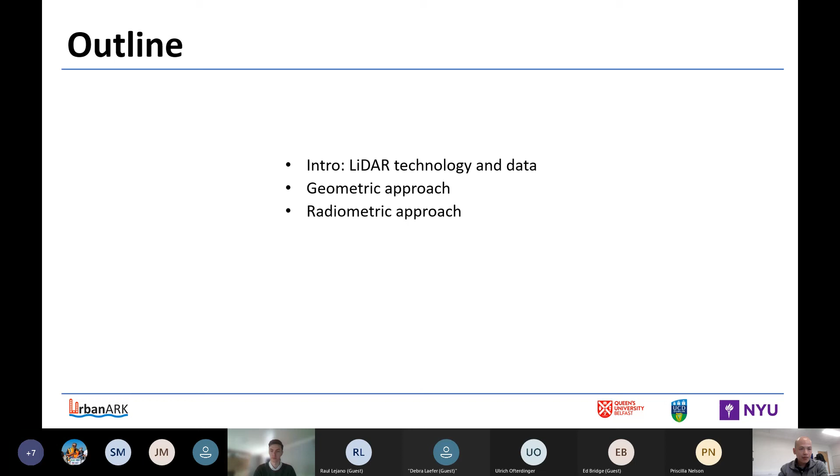So that is the outline of the presentation. I will first provide an overview of LiDAR technology and LiDAR data, and then I will go on to introduce the two approaches. We call them the geometric approach and the radiometric approach. So LiDAR is an acronym for light detection and ranging. Essentially, it's a technology that uses light, usually in the form of a laser, to measure range or distance.

The diagram you see on the screen shows the operating principle of the most common type of LiDAR, which is called time-of-flight LiDAR. Here we have a LiDAR sensor on the left-hand side, and on the right-hand side, we have a target surface. What we aim to achieve here is to measure the range value R, which is the distance between the sensor and the target object.

To do that, the sensor emits a laser pulse, which is a strong and short impulse of optical energy towards the target surface. The sensor then captures the time for the laser pulse to travel to the target surface and back to the sensor. That amount of time is denoted as t, parameter t here in the equation.

And when we know the travel time and the traveling velocity, yes, we know how fast light travels, then we can calculate the traveling distance. Because it is a round trip, we need to divide the traveling distance by 2 to obtain the range value. So that's basically the principle behind most LiDAR systems. There are 2 additional points I want to highlight here.

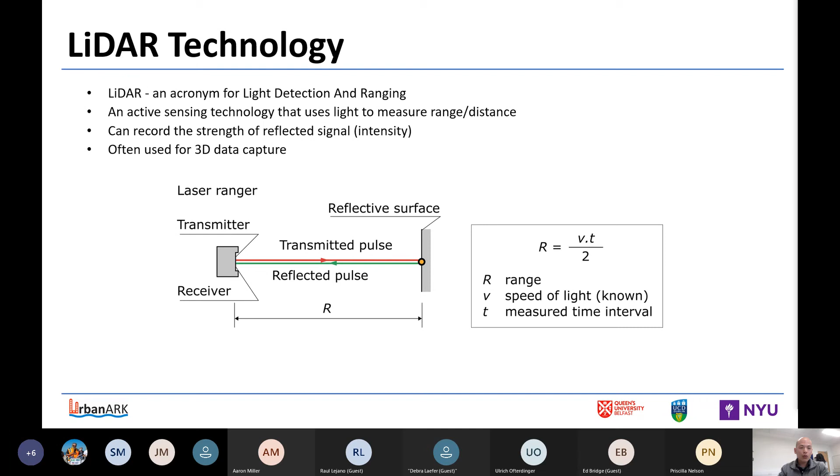Second, in addition to measuring distance, most LiDAR sensors record the strength of the reflected laser signal. So in the presentation, I use the term LiDAR intensity to refer to that signal strength. And that intensity value represents the radiometric property of the target objects. You can think of it like how reflective the target object is to LiDAR.

So if you have heard about LiDAR before, there's a good chance that you know LiDAR as a 3D mapping technology. But what I introduce here is a ranging technology. So what's happening here is that this LiDAR sensor is very often used in conjunction with additional sensors for 3D mapping. The LiDAR itself can do ranging only, but we can incorporate the LiDAR sensor with additional mechanisms to do 3D mapping.

So, for example, in the animation you are seeing here, a LiDAR sensor is mounted on a helicopter. A scanning mechanism sweeps the laser across the flight track, and together with the movement of the helicopter, let me play the animation again. So together with the movement of the helicopter, we can cover not only a single point, but a large spatial extent along the flight track.

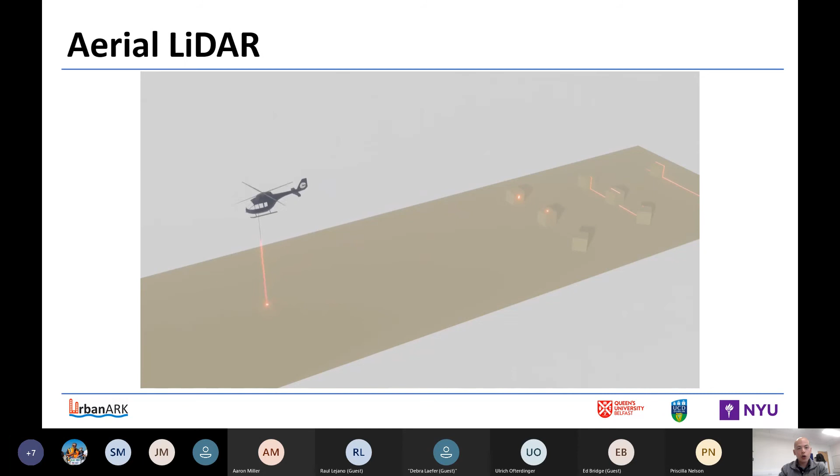And by combining the raw ranging data from the LiDAR with the angle of the laser beam, as well as the position and orientation of the helicopter, we can derive a 3D representation of the scene we fly over. So that is an overview. That is an example of such a 3D representation captured by airborne LiDAR.

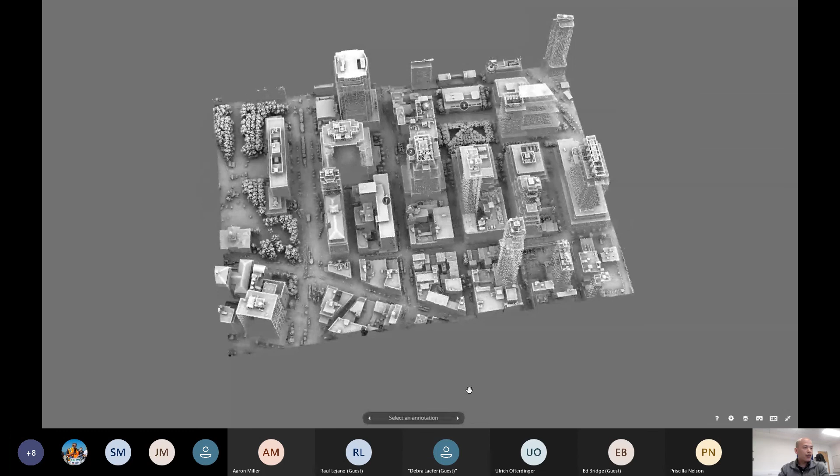Let me show you in an interactive form. So that is the 3D representation captured by LiDAR. The area you are seeing here is 370 Jay Street. That is the Center for Urban Science and Progress. That is One MetroTech and the library of NYU Tandon. Let me switch back to the presentation.

So the data captured by LiDAR are usually referred to as 3D point clouds. A point cloud is a spatially coherent but unorganized set of 3D points. If you open a LiDAR data file and look at the numbers inside, you will see that a point cloud is composed of a set of point records. Each record or each row in the table represents a spatial point, and a record contains the 3D coordinates of the point as well as additional attributes such as intensity values.

or currently being collected. The project is expected to complete by 2023, and one of the main uses of LiDAR is to create digital elevation models, including digital terrain models and digital surface models. The USGS has identified more than 600 business use cases potentially benefiting from LiDAR and data products derived from LiDAR. The top one on the list is flood risk management. One of the biggest contributors to the project is FEMA, the Federal Emergency Management Agency.

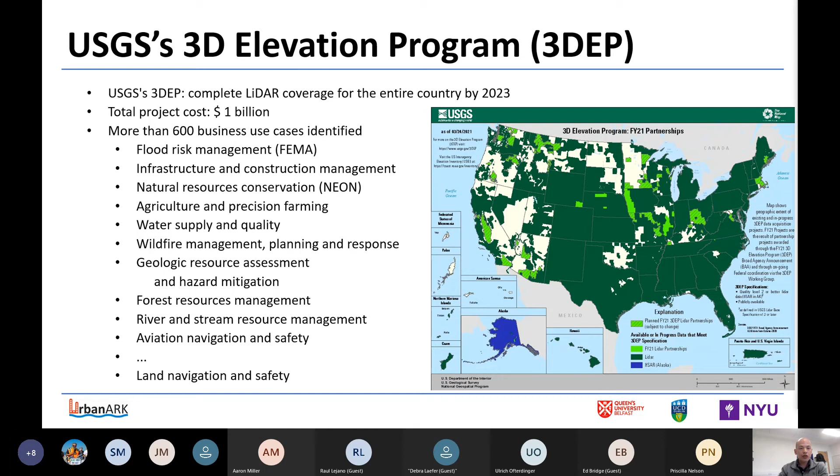Such an amount of data could very easily defeat many traditional computational solutions, and that calls for more powerful, more efficient computing approaches. And that is exactly what motivates our research here at UCD. We are working hard on developing innovative LiDAR data management and analysis algorithms that can take advantage of massively parallel computing infrastructure to tackle the large and increasing volumes of LiDAR data.

And the algorithms for subsurface structure detection are part of the research outcome that emerged along this research direction. So before discussing the geometric approach, let me go straight in and share with you an example of the result that we obtained from the algorithm.

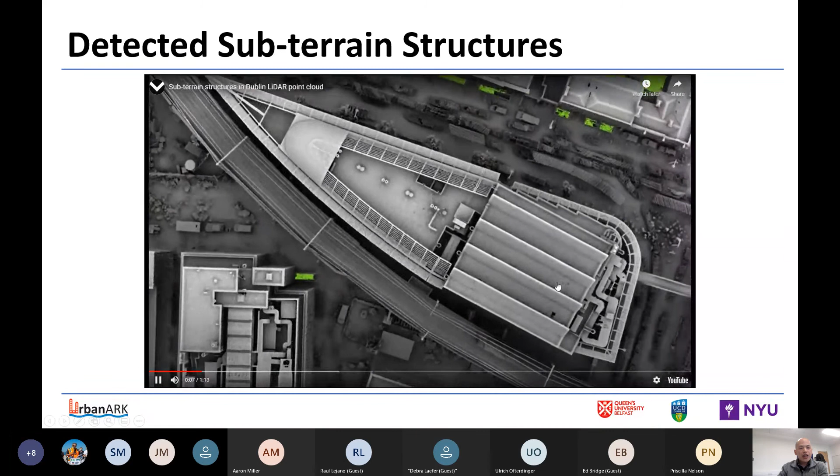The video is loading. Yeah, so you are seeing a three-dimensional point cloud colored in gray, and the green points overlaying the point cloud are the subterranean points that were automatically extracted. Here you can see an outdoor staircase that leads from the ground level to a basement at the back of a tall building in Dublin city centre.

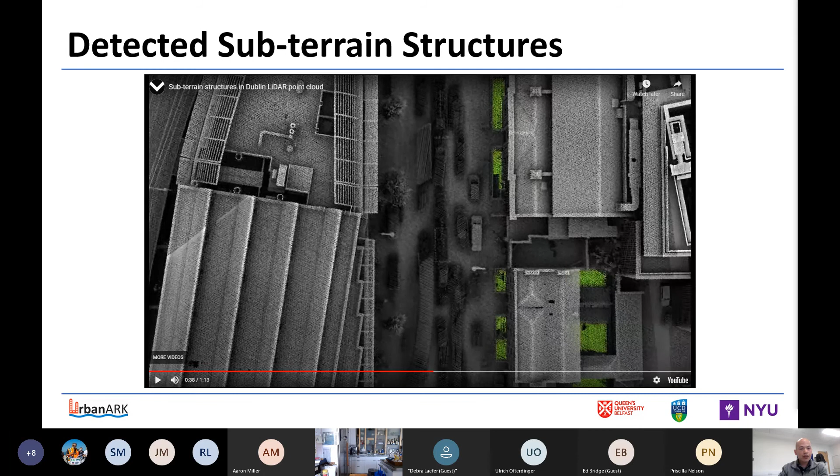I'm continuing the video. So if you know Dublin, you may know the Science Gallery, which is part of Trinity College Dublin campus. And across the road from the building, we have some Georgian terrace houses. As typical in Georgian architecture, the houses have front basements visible from the street, and the back gardens are lower than the surrounding terrain. The cross-section showing up in a couple of seconds may show you the structures clearer.

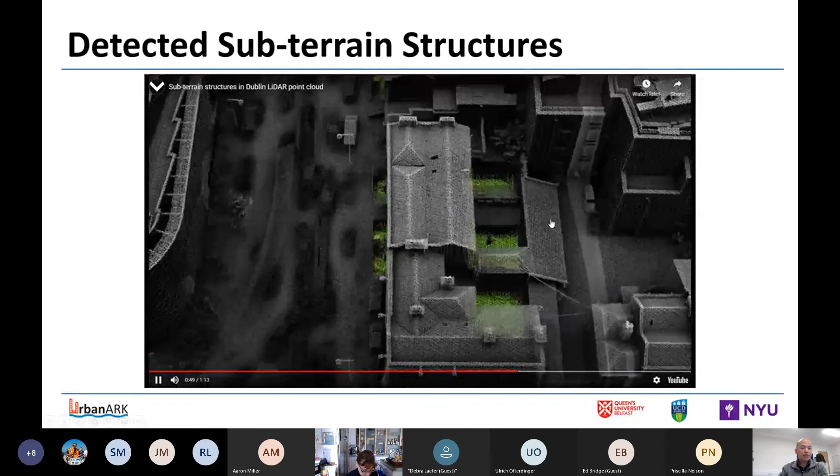So this is the cross-section we are waiting for. Again, the green points are those detected as reflections received from subterranean structures. As you can see, the front basement and back gardens were successfully detected and extracted by the algorithm I'm presenting today.

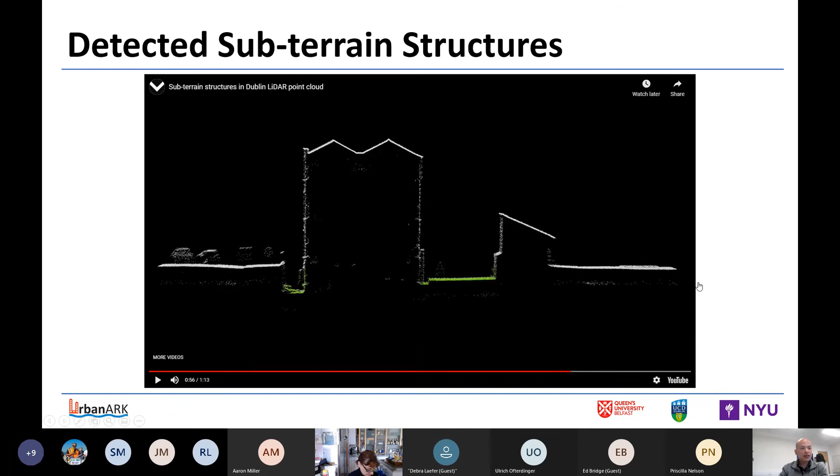So the reason we in UrbanARK are interested in developing such an algorithm is because subterranean structures have an important role in flood risk assessment. First, the structures lying below the ground level, particularly those used for residential purposes, are more vulnerable to flooding, and we need the knowledge of such structures to better analyze the risk and the vulnerability.

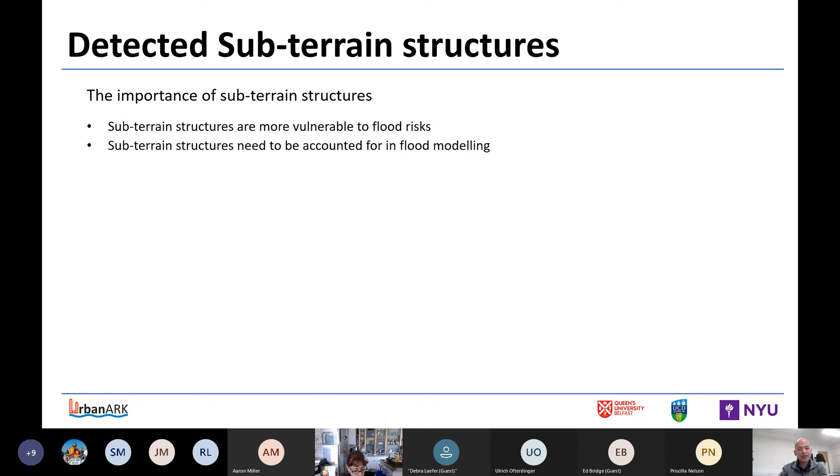Second, we see that subterranean structures are important for accurately predicting flooding. Those structures have impacts on the dynamics of the flood flow as well as the inundation level in a flood event. But most existing flood models do not account for the impacts of subterranean structures.

Our geometric algorithm has four main characteristics. First, it is based on a very simple geometric principle. Second, it is parallel. More precisely, it is massively parallel. And massively parallel is not a marketing term. It's actually a technical one. The term refers to the use of a very large number of computer processors, potentially from multiple computers, to massively reduce the computational time. So the reduction can be in the range of several hundreds of times.

And that characteristic is related to the third one, which is scalable. Because of the ability to compute in parallel, the algorithm is suitable for dealing with a large amount of data and to cope with future increases in data volume. And that's the key characteristic that distinguishes our work from others.

The last characteristic is robust. We have tested the algorithm under various scenarios using different kinds of data in all of our 3 study sites in Dublin, Brooklyn, and Belfast. And we see that the algorithm works consistently.

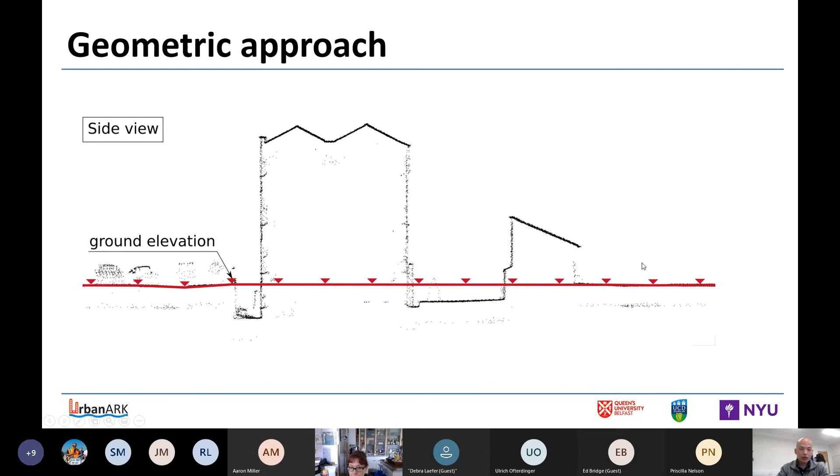So here is the simple principle behind the algorithm. The data to be analyzed is a 3D point cloud that contains geometric samples from the terrain as well as above ground and below ground objects. We assume that we have a digital terrain model that gives us ground elevation over the area of interest. Those are shown in red color. And you can think of a DTM as a membrane that cuts through the point cloud and separates above terrain and below terrain data points.

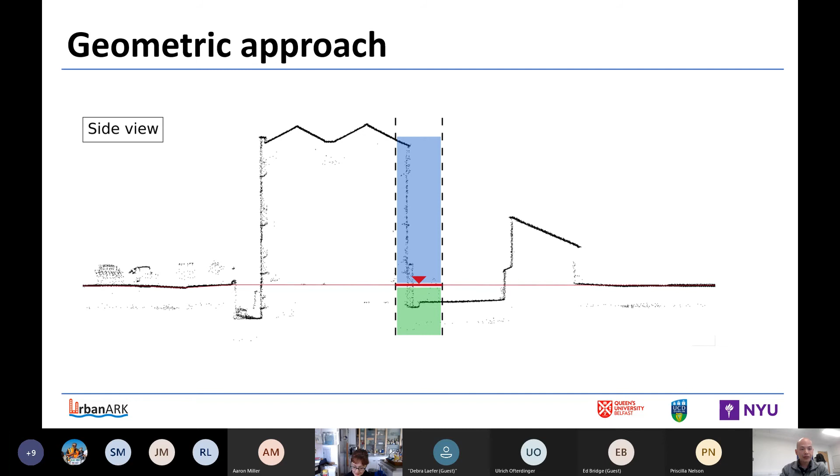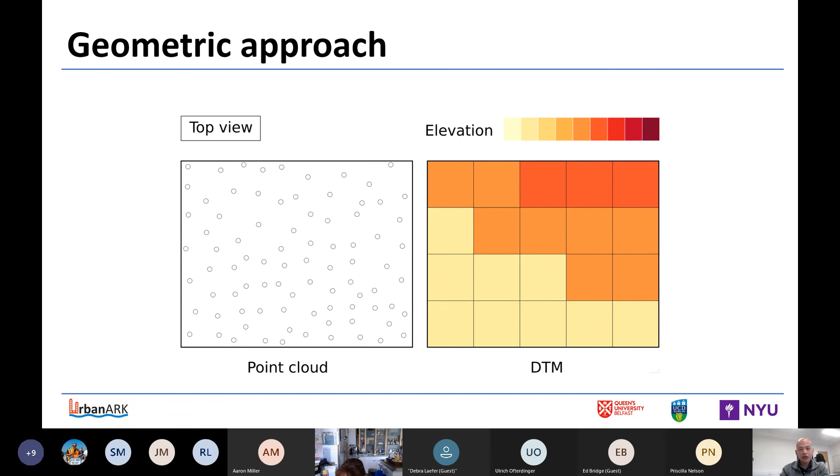What we need to do in order to use the DTM to detect or extract subterranean points from the point cloud is to line up each point in the point cloud with its corresponding ground elevation indicated by the DTM. The point cloud is irregularly distributed, as you see in the figure on the left-hand side. And unlike the point cloud, the DTM is often represented as a raster, meaning that the elevation values are structured in a regular spatial grid consisting of cells or pixels arranged in columns and rows, as you see in the figure on the right-hand side.

So you may remember from the earlier introduction of LiDAR data that the geometric component of a LiDAR point is represented as a triplet of X and Y and Z coordinates, usually in a geographic coordinate system. And each raster cell in the DTM is represented by its raster index and an elevation value Z. The raster index is a second-order tuple that contains the row index and the column index of the cell, which are identified in the discrete coordinate system of the raster.

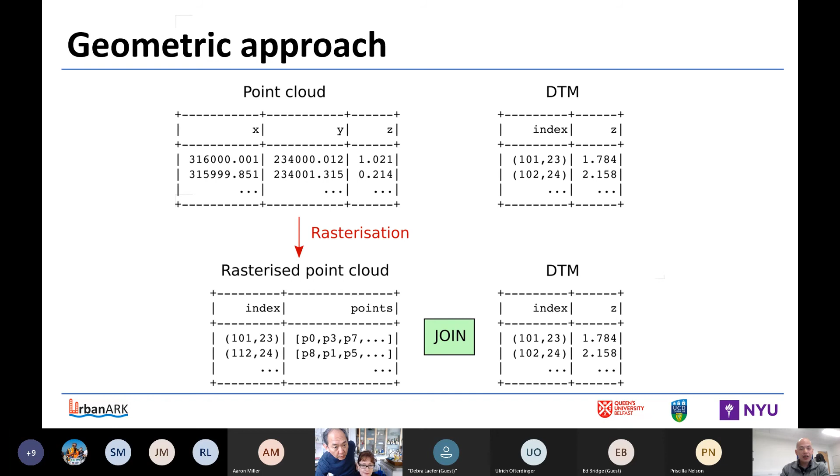So our job is to transform the two input data sets into an agreed format and an agreed coordinate system so that they can be linked together. The format that we selected is the raster format of the DTM. In other words, what we do is to rasterize the point cloud. And after the rasterization, we have a common index, which is the second-order tuple here, for both the point cloud and the DTM. And at this stage, the join is very straightforward, except that both of the input datasets are very large. Each can contain several billions of records, and joining such large datasets is computationally complex and time-consuming.

The algorithm that we developed has an efficient way to team up multiple processors from many machines to perform the complex and demanding operation very rapidly. Just to give you a quick sense, we tested a relatively large dataset of 1.4 billion points here in Dublin, and performing the detection took almost 2 hours with one single core. But by connecting 128 cores together, we were able to reduce the processing time to just over 2 minutes.

And that computational efficiency behind the parallel join is actually the main accomplishment from the research point of view. But as it is not the focus of our discussion today, I will not go further to provide details of how we actually did it. Instead, I'm sharing a few more examples of the results that we obtained, this time for an area in Brooklyn, so that I hope you can get a clearer idea of what the algorithm is capable of.

And this is the input point cloud on the left and the digital terrain model on the right that we used. The point cloud shown on the left is part of an aerial LiDAR survey Professor Deborah Laefer undertook in 2019 over the Sunset Park area in Brooklyn. The point density of this dataset is over 500 points per square meter, which is 50 times higher than the typical aerial LiDAR point density. That high density is very critical to the success of the algorithm.

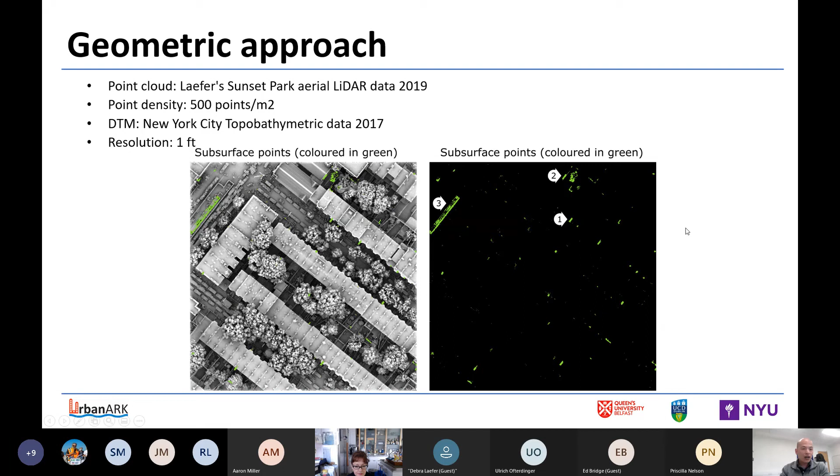The last example I want to share is not from a house, but from some kind of urban infrastructure, which looks like a ventilation shaft of the subway system. The structure sits on a traffic island. The structure has a part that is lower than the street level, and that has covering grates, which are not entirely solid. What we see here is that the LiDAR beams were able to penetrate through that cover and capture the lower points underneath, and our algorithm was able to detect those as well.

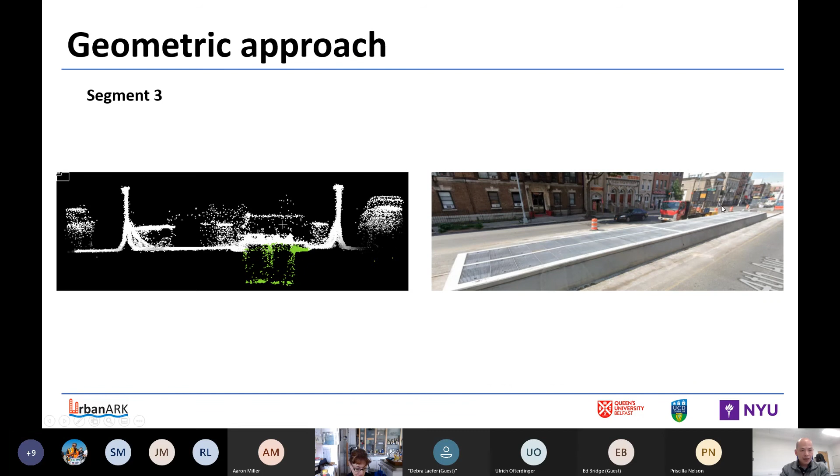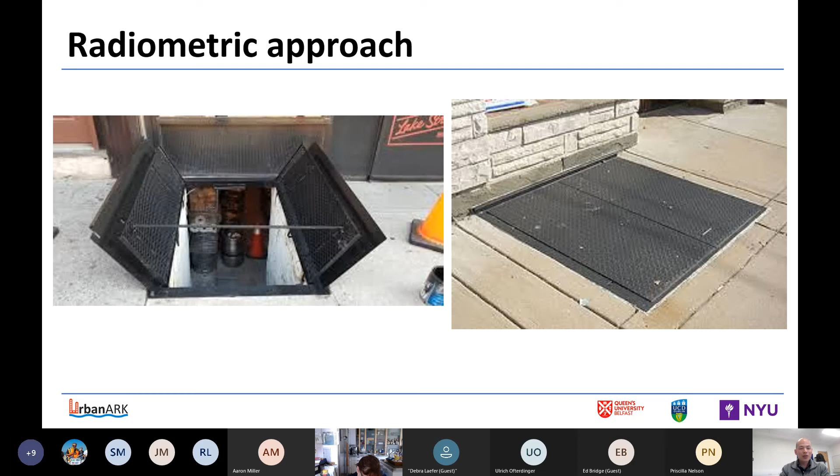Now I'm moving on to the second approach called the radiometric approach. There are actually some initial thoughts that we had when we heard about the sidewalk vault problem in New York. The geometric approach I just presented would not be able to detect those that are covered unless the covers are open, like the image on the left-hand side. But in addition to the geometric information, LiDAR also captures the radiometric properties of the scanned object. And that information is represented in the last column, column I, or intensity, in our table here.

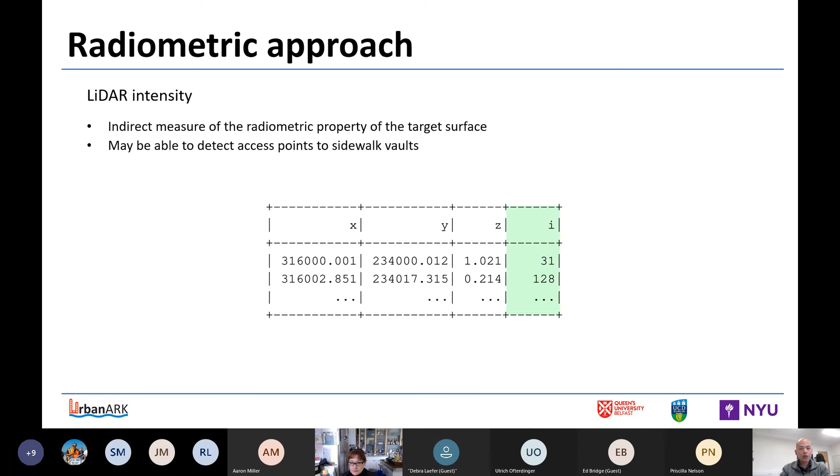To recap what we mentioned before, the intensity attribute indicates the strength of the laser signal when it is received at the sensor. That attribute partially represents the reflectivity of the target surface. In other words, the radiometric properties of the surface. And our hypothesis is that the radiometric data can be used to detect the covers of some sidewalk vaults if the covers are made of materials that are distinguishable from surrounding pavement. And that is an initial result that we have.

Also, using the radiometric approach is not as simple as selecting points that have intensity values that fall within a certain range. A better way to use that is to combine the radiometric attribute with geometric information. For example, we can perform a spatial clustering operation to group nearby points that have similar intensity values. Then we could potentially extract the shape, the size, and the location of each cluster. And those derived information then become the input to the object detection process.

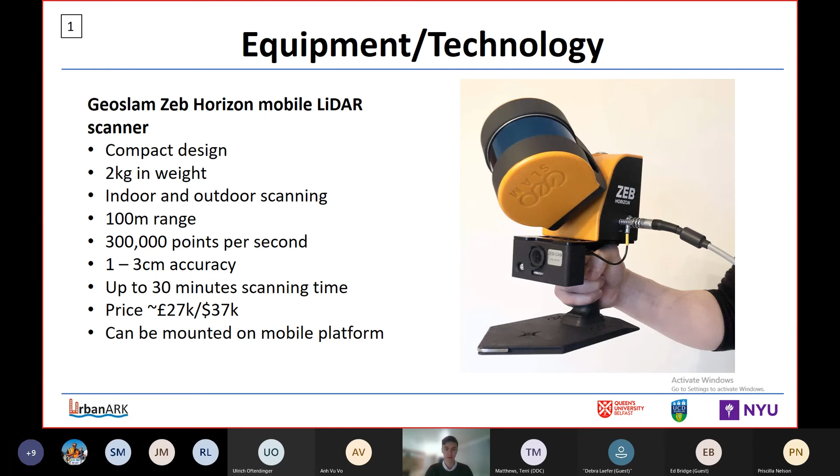As I said before, the GeoSlam captures 300,000 points per second, and that leads to the point density of this one on the left being 30,000 points per square meter, which is just far above what's available with aerial LiDAR, and what's available in Belfast is 4 points per square meter.

So you can really see the difference there. And so how does the equipment work? Well, the equipment works using SLAM technology, as is in its name, GeoSlam. SLAM stands for simultaneous localization and mapping, and it allows the scanner to create a 3D model of the environment around it and locate itself within that environment. This is the same as how robots work when they're moving their way through a room. They know where they are, they're able to know their distance between them and all the objects around them.

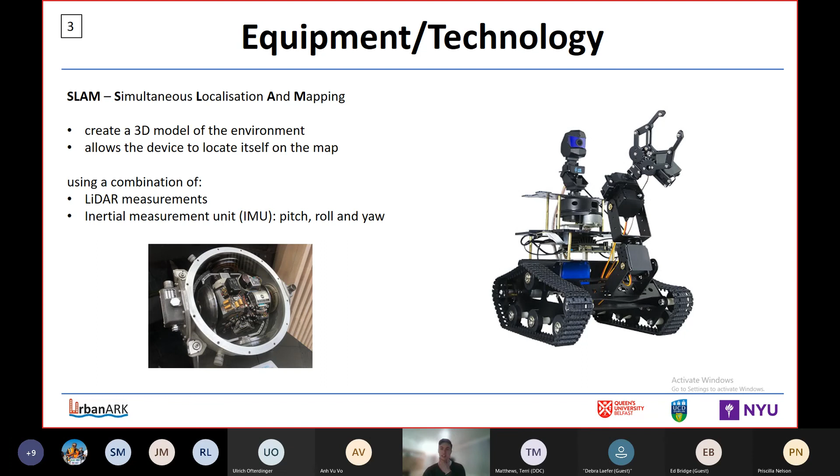So how does SLAM work? It uses a combination of LiDAR measurements. As we mentioned, LiDAR is pulses of light, and the machine takes in how long that light takes to return to the machine, and by that gets distances to objects. So we've taken into account distances to objects. It knows where it is in relation to those objects around it.

It also uses an inertial measurement unit. Inertial measurement units are typically seen in aircraft, or in this case, this massive one here is from a spacecraft, a NASA spacecraft. So the one in the machine isn't quite as big as this, but pretty much it is used so that the device knows its orientation in space. So it knows what direction it's pointed, it knows if it's been tilted or if it's pointed at the ground or upwards. And using a combination of its distance to other objects and how it's orientated in space, it's able to work out where it is in the map.

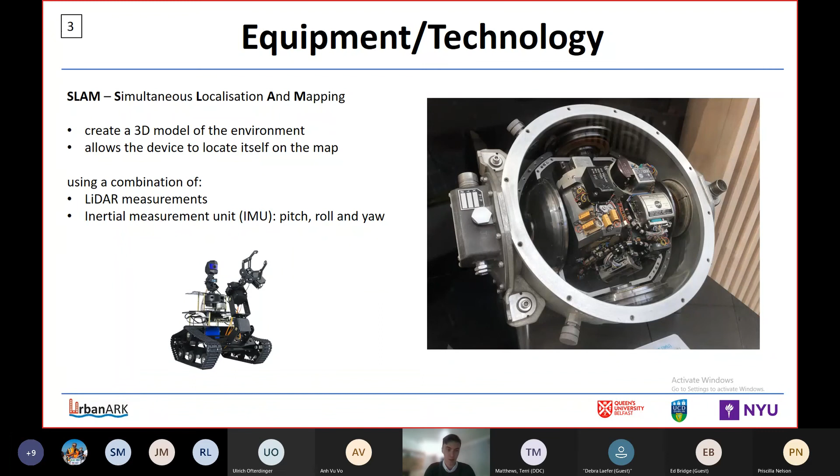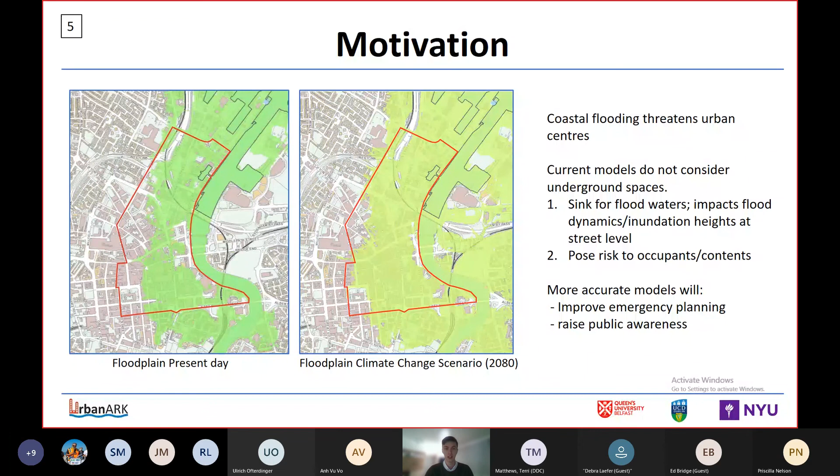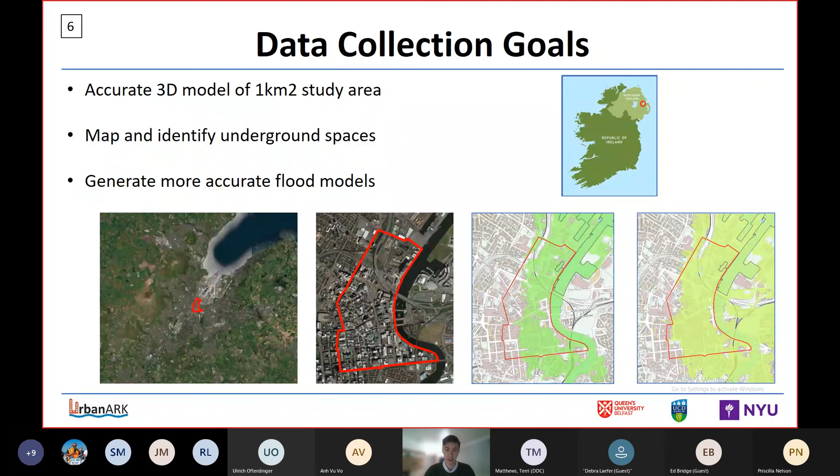So as I said, the data collection goals. Here's a better look at our study area in Belfast. You can see it's right on the east coast of Northern Ireland. If you didn't know where Belfast was, you can see our study area is in the urban centre, and it's right at the coastline. What we want to do is create an accurate 3D model of our 1 kilometre squared study area. As I said, map and identify the underground spaces and generate more accurate flood models.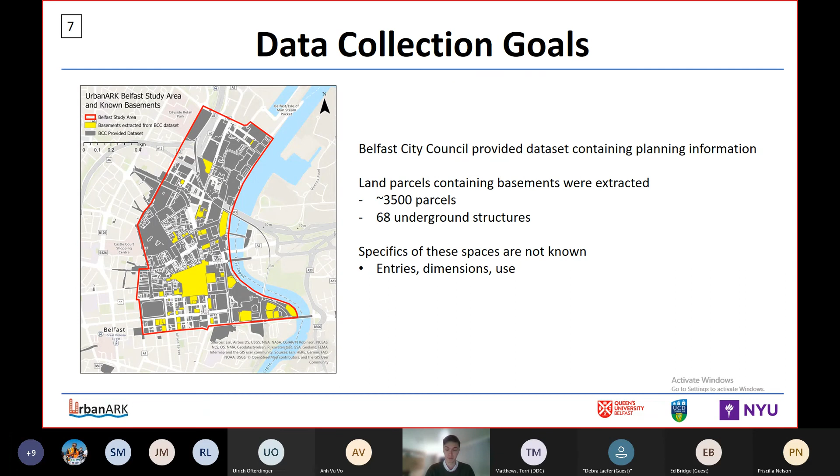The problem with that is these are land parcels. Each one is not relevant to a building, and they're not the same shape as the building, so you're not getting the dimensions of the basements or the depths. We're also not getting the entries to the basement. We don't know if there's vehicle entries or if it's just windows or doorways. We don't have any of that information, so we don't know how these would interact with floodwaters. They do have a use with them, but a lot of them, from my experience, have been outdated. And we know that uses of spaces change over time. So we want to update all of this information.

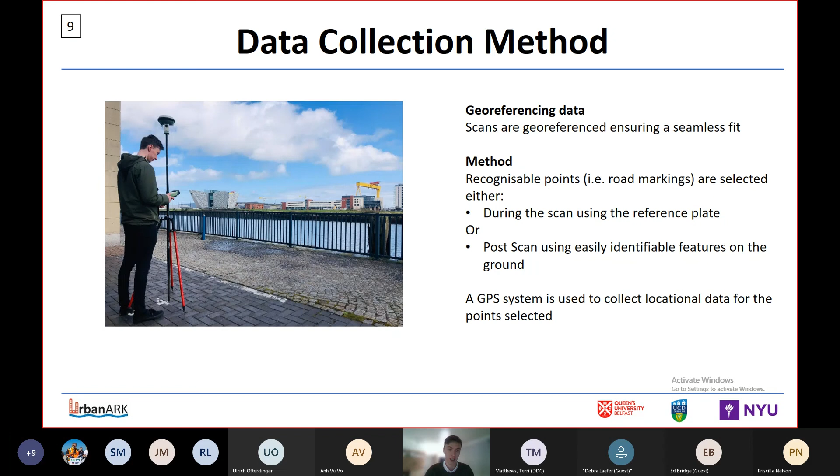There's the Titanic Museum and the Harland and Wolff cranes, and I'm collecting GPS data. So the first method here is the reference plate method. So again, on the left, you see the GeoSLAM. At the bottom, this is an attachment called the reference plate. It's quite heavy, actually, probably 500 grams or a pound, and there's a hole in the front of it.

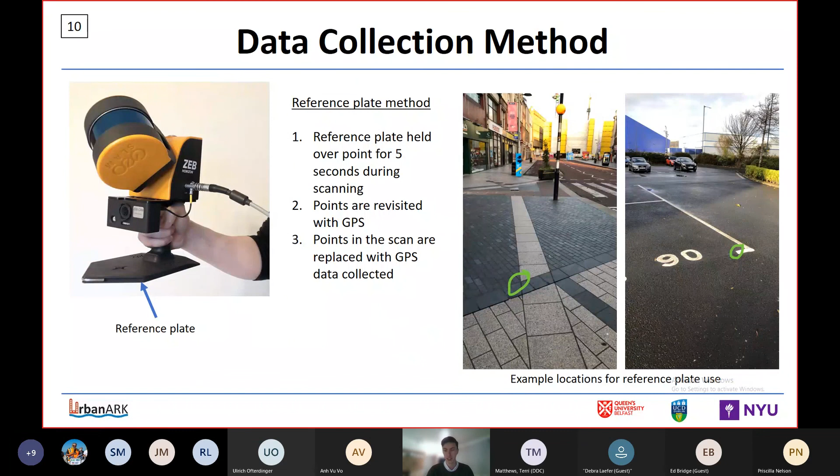So all I do, as I'm walking around scanning, at any point, I can find a feature on the ground as shown here on the right, either a recognizable feature. So here you see the end of a brickwork, and it's quite easy to find the point, or lines and road features, which is what I use mostly. And all I have to do is put the hole in the reference plate on one of these points for 5 seconds. And when I revisit the scan afterwards, these points are highlighted, and I'm able to switch out that point information with GPS data I capture afterwards. And therefore, the scan is georeferenced.

And the second way is not as accurate, as I said before, and it's a little bit more tricky. So the scan has been collected. I go into the scan, find road markings. As seen here, you can see the letters. This would be a prime area to do it. Or street coverings here, not as clear, but these can be used. I then make a note of which ones I want to collect, go back into the urban environment and collect these points with the GPS. Afterwards, I can then input both in the software, and I simply match up the scan with its features to the GPS points I've collected, and it lines up, and then that is it georeferenced.

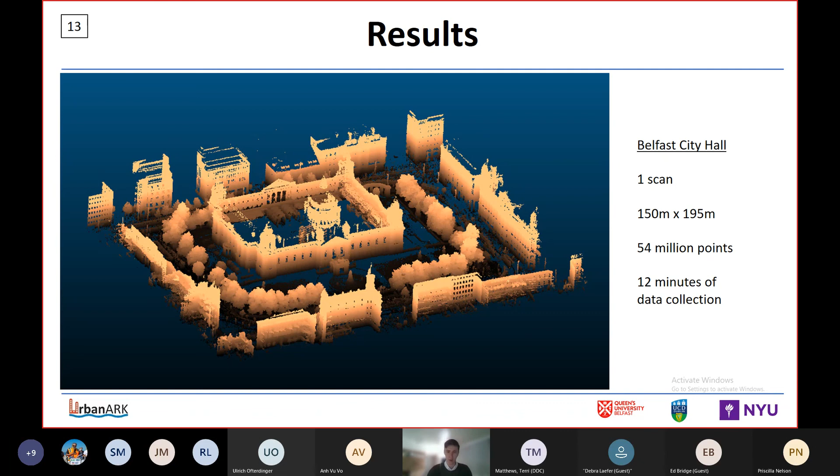So if we want to make a bigger model than just that one I've showed very quickly, we're able to do that in the software which comes with the GeoSLAM. It allows you to line up four to five scans very quickly by roughly lining them up, and then it uses similar features from each scan, geometric features, to line them up very quickly and accurately, actually. But it has a limit of four to five scans, so that's why georeferencing has to come in.

And collecting GPS points is one of the massive tasks to go with this. It takes the most time. The GeoSLAM itself is easy, so by limiting the amount of time we spend doing that, we're really speeding up the process.

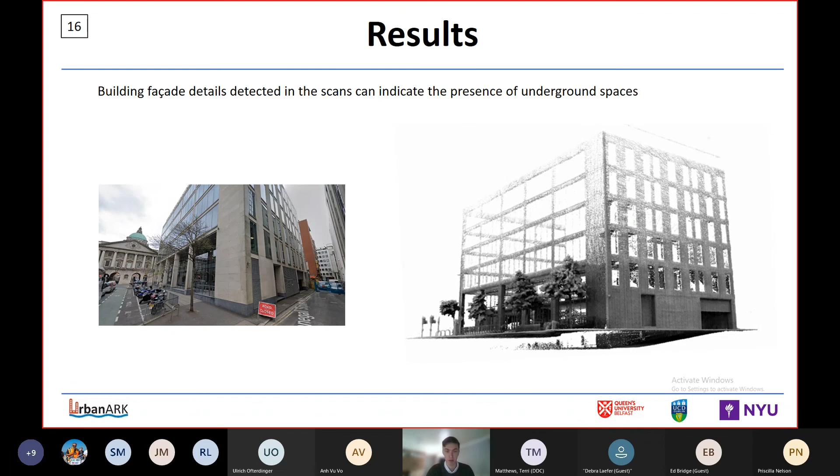Here's another example which is quite interesting. This is an apartment block in Belfast, and it has this unique feature where there's an underground car park here, but there's ventilation and lighting being let in by these openings here, which are pretty much like grates, I'd say, on the wall. And from those alone, just from me walking past these, I'm able to get full depth measurements using the GeoSLAM, because the laser is able to penetrate through that area, collect depth measurements, and bring them back to the scanner. It's really interesting here, because walking past, you would hardly even notice that, but you can see it clearly on the right.

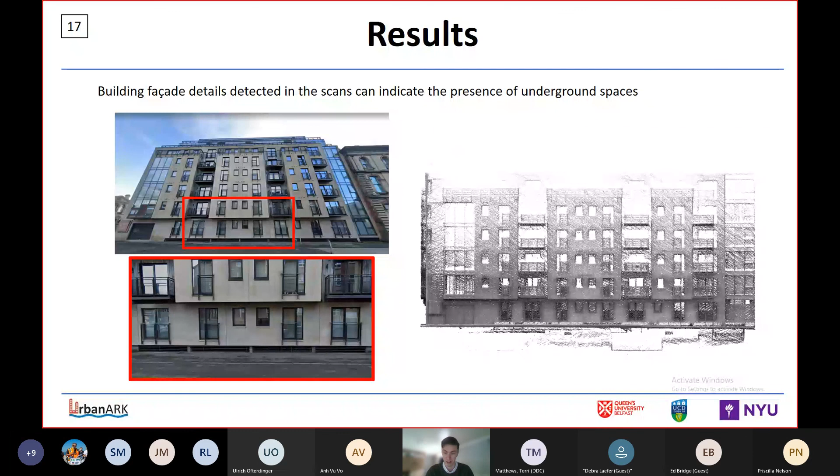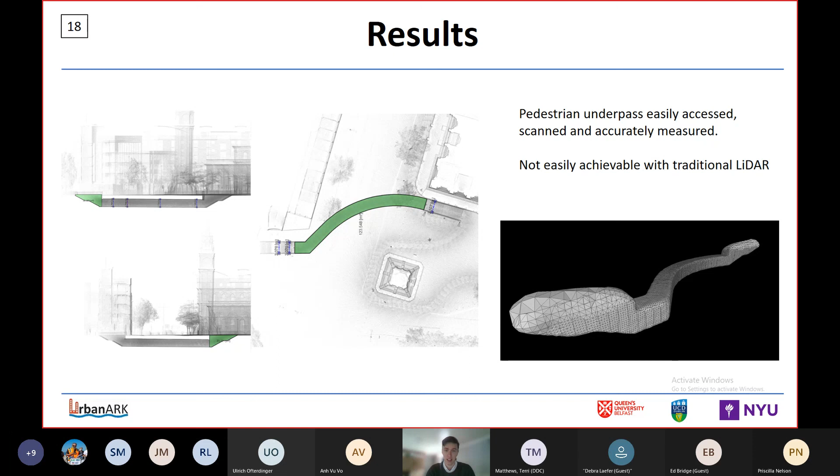Now, these are important details because they're not captured at all in the airborne data. But with GeoSLAM, we're able to capture the details, the elevations, their width, the volume, and this would have a massive impact on flood dynamics in this area, as water could just pass through these easily and would affect all the buildings in between.

So in conclusion, the GeoSLAM is a cost-effective way of mapping the urban environment. It's relatively accurate, as you can see with its comparison to the terrestrial laser scanner earlier. It's highly maneuverable, which is one of the massive positives it has, where we can enter the underground spaces. We can get into tight spaces where other things can't, like aerial data misses out on these narrow alleyways and

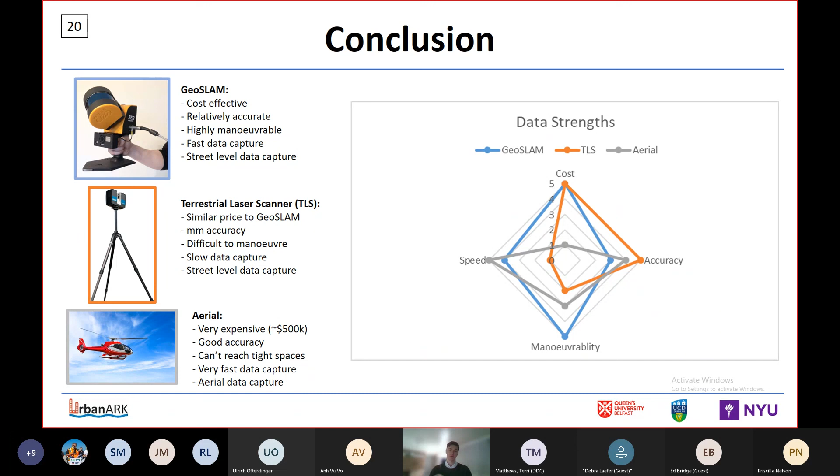underground spaces. And the terrestrial laser scanner is very slow to move around compared to the GeoSLAM, which is very fast. Not as fast as aerial, but you have to weigh these things up. And it allows for street level data capture, which allows for more accurate data to be collected from building facades as opposed to aerial data, which mostly concentrates on the ground level and on rooftops.

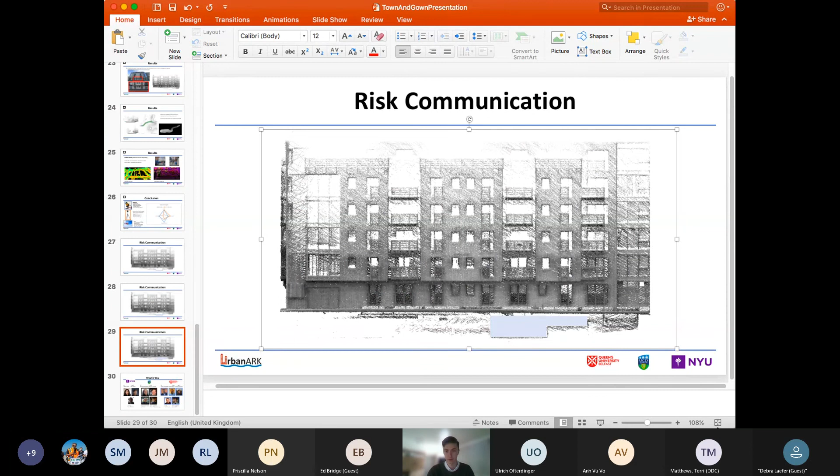Terri, are you guys able to see my screen? Is that risk communication? Yeah.

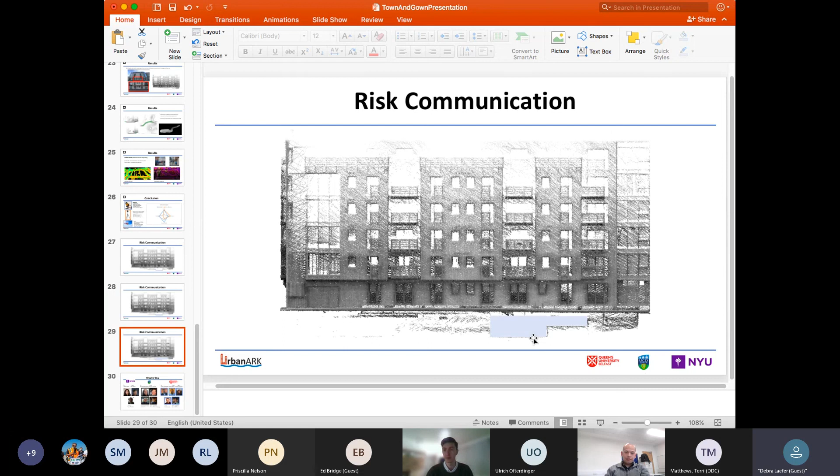Yep. So just, what do you do with something like this? So the idea is here's that building, and then you have the opportunity to do some modeling, both as these spaces as sinks and as areas of particular risk, as well as using this just to communicate to residents and building occupants about what might be going on locally in their neighborhood.